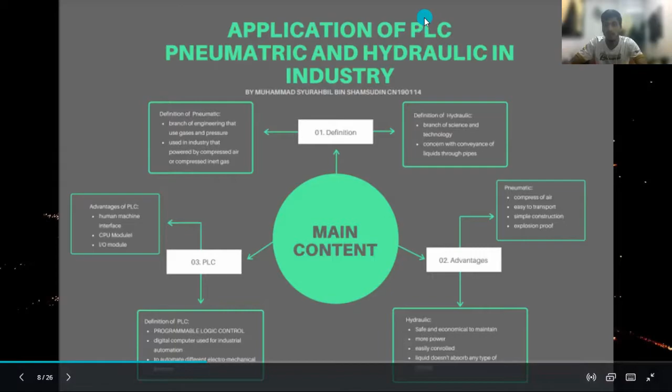Next is week number 2. Week number 2's activity is Miss Maya sharing with us about the PLC course activities from the previous semester. Miss Maya shared it via Author, so I downloaded the slides. I managed to capture some important things from the slides, which is Miss Maya sharing the activities done during physical class, which is PLC application learned during physical class at the lab.

Next is number 5, which is online learning for our current state during this pandemic. So we do online learning. Ms. Maya shared the video presentations and group project presentations from our seniors. Ms. Maya highlighted some groups whose design projects were quite good that we can use as an example.

Another one is about PLC industrial application design. Ms. Maya also shared some projects, such as a fully automated washing machine by our seniors. So that's all for week number 2, which was just some sharing on previous semester PLC class activities.

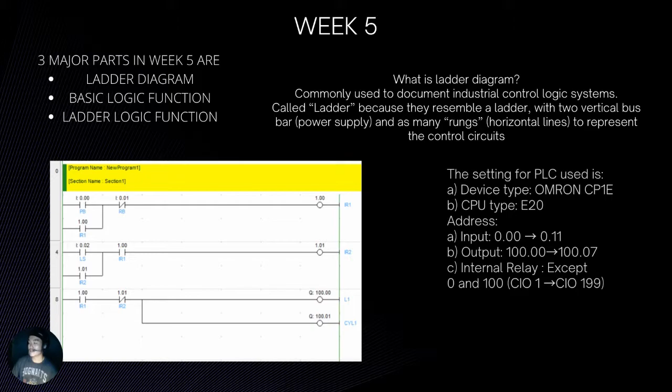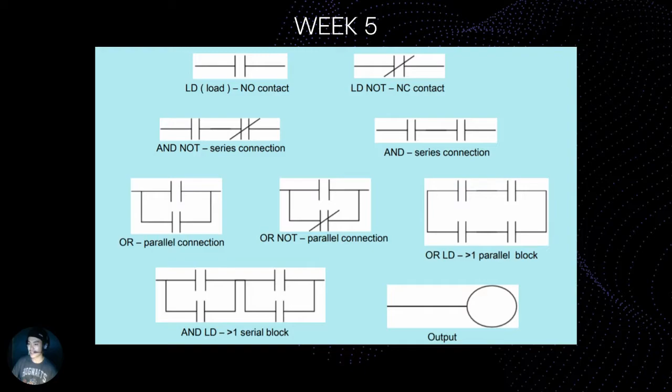In this course, we are using the Omron CP1E E20, and the address for the input output is 20. We also learned about the basics of normally open and normally closed contacts and their connection. Third, we have learned how to convert a ladder diagram to mnemonic code. This is an example of conversion from the ladder diagram to the mnemonic code. And then we have learned about basic logic gate functions, as you guys have learned in physics and digital courses.

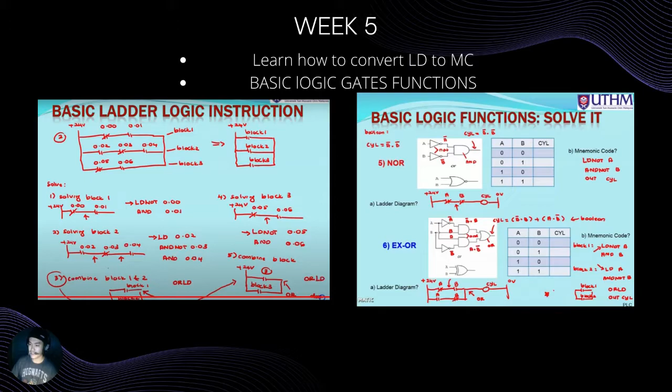And then in week 5, we have also learned about how to write mnemonic codes. We have done a table which consists of rung, step, instruction, operand, and comment. I think that's all what we have learned in week 5. Thank you. In week 6, we have a few case studies.

For example, the first is the float sensor, the second one is latch push button, which applies the normal latching concept, which is the same as set. It's the same as keep instruction. And then the third one is traffic light. This is just a basic traffic light, which consists of 2 green and 2 red lamps. When both of the green lamps are turned on, an alarm will set.

And then there is a car. The car mechanism is basically based on the seatbelt at the passenger and driver, and the pressure sensor, which indicates whether the seat is occupied or not. And then the fifth one is the machine. For a safety reason, 2 of the buttons need to be pushed for the machine to be operated.

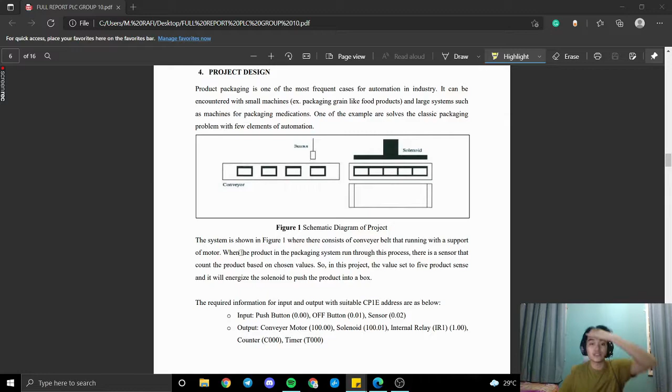So like we all can see right here, this is the program. This program consists of a conveyor belt that is running with the support of a motor. When the product in the packaging system runs through this process, there is a sensor that counts the product. So we need a sensor and then count the product. Thus we need the counter in this program.

So in this project, the value is set to 5 products and it will energize the solenoid. So we need a solenoid, and then the counter will be set as 5. So first of all, we need to clarify the input output address. So for the input, we have push button on with the address of 0.00, and then push button off with the address of 0.01, and a sensor with the address of 0.02.

For the output, we need to have an output for the conveyor motor with the output of 100.00, and then solenoid 100.01, and then we need an internal relay. Internal relay we can pick from the range of 1.00 to 199. So we'll pick 1.00, and then the counter, which will be named with the address C000, and a timer with T000.

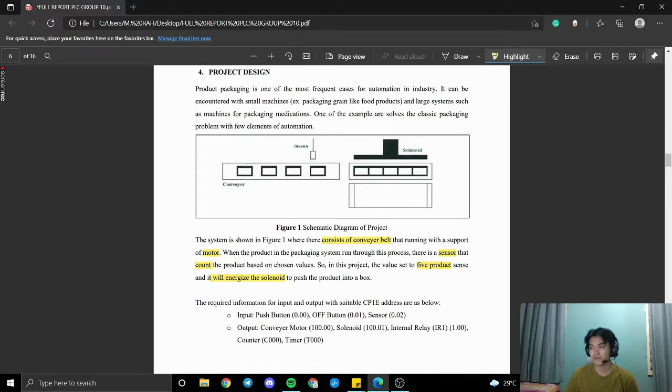Okay, so after we have clarified the address for input output for CP1E E20, we need to do the process sequence description. In this part, it is really up to you. Either you want to use the motion diagram or the GRAFCET method, but in this case study, we'll use simple narrative. This is the column for input, and this is the column for the output.

So number 1, push button PB with the address 0.00 is pressed. The internal relay with the address of 1.00 will have a high value, and the conveyor motor with the address of 100 will energize. And then the sensor with the address 0.02 detects product, and then counter C000 counts down until 5 products.

After the counter finishes the count, the solenoid will extend for 5 seconds, and then after the timer finishes or time's up, the solenoid will retract and reset the counter. And then number 5, when the push button off with the address of 0.01 is pressed, it will stop the conveyor motor 100.00 and all of the operation.

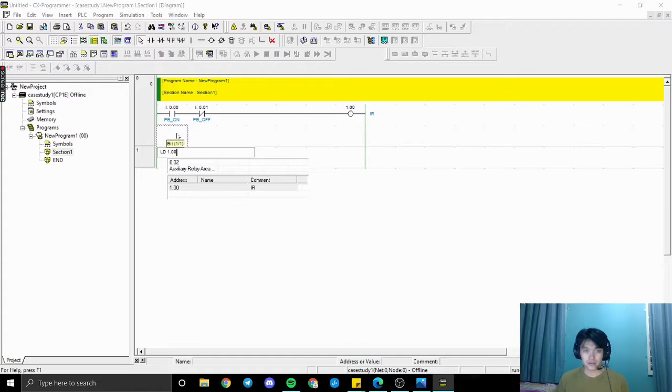Okay, so we will have the internal relay right here. So we click output. So for the internal relay we will use channel 1.00, and we name it as IR, internal relay, since we will use just one internal relay. And then we'll have normal latching right here. So we'll put a normally open contact with the same address as the internal relay, 1.00, and then we'll connect this in parallel with the push button on.

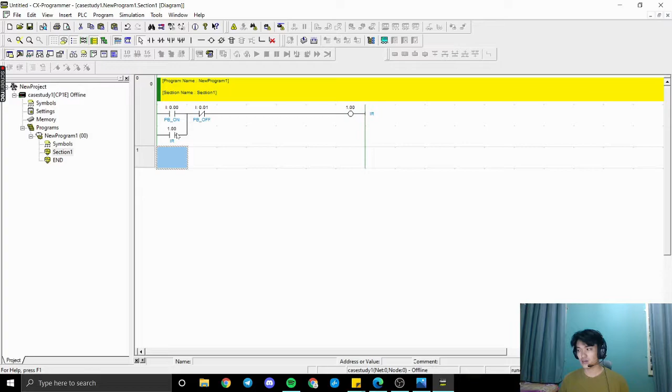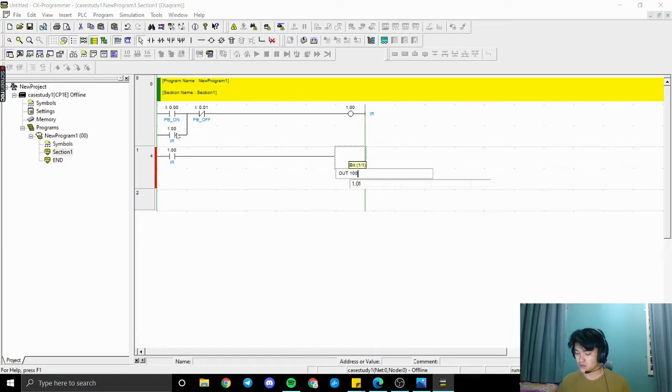So we have finished rung 0, and then the program wants us to move a conveyor belt by using a motor. So we need to power the motor. So we'll put an NO contact right here for the internal relay 1.00, and then we'll have an output right here. Since we have clarified that the address for the motor is 100, we'll put 100.00 right here. So we'll name it as motor. So sorry, motor.

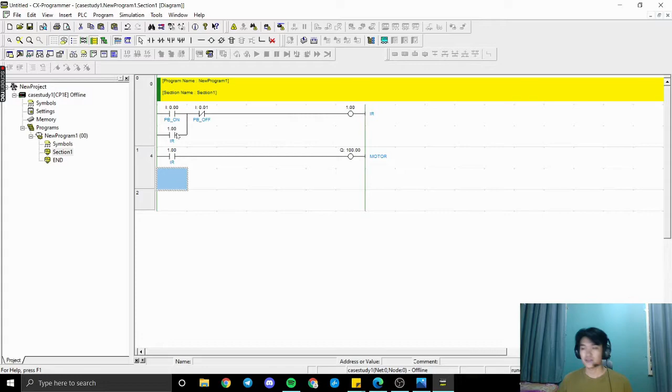Okay, so when we push the button, the normal latching will keep the value always high, and we'll move the conveyor belt. Now the conveyor belt has moved. Now we proceed with rung 2. And then we need a sensor, when it counts to 5, then the solenoid will push the item.

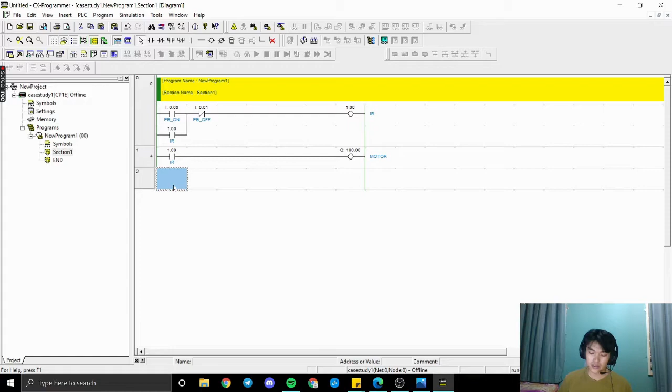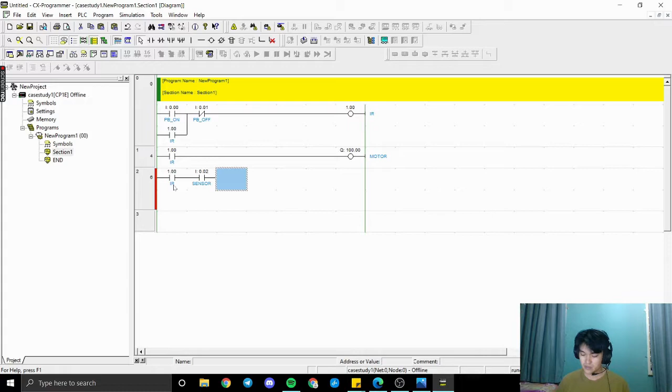Okay, so we need the internal relay right here, and then we need a contact for the sensor. For the sensor, we'll put 0.02. We'll name it sensor, and then we'll put a counter. Wait a minute. And then we'll put a counter, CNT, counter 0, and we'll count it. The value is 5.

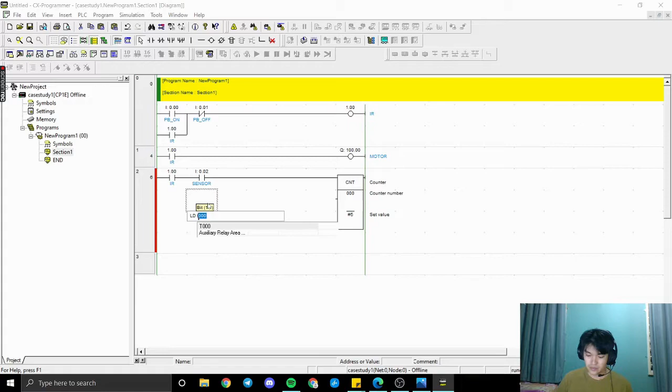Okay. So right here is the reset, and this input is the reset input. So we need a timer. We need to put a timer. I'm so sorry. 0.

Right here, and then this is the timer. I'll connect with this input. Okay, so now we have a counter which is connected with this sensor. The counter will energize when the counter counts 5, 4, 3, 2, 1 in descending order, and then it will energize and push and power the solenoid.

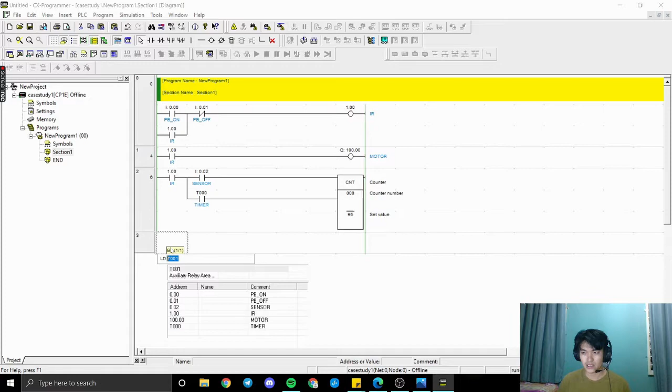So we need a contact for the solenoid. The counter is C000, and then we name it as counter, and then we'll connect it with a solenoid. The solenoid will use channel 100.01. So output 100.01. So this is the solenoid.

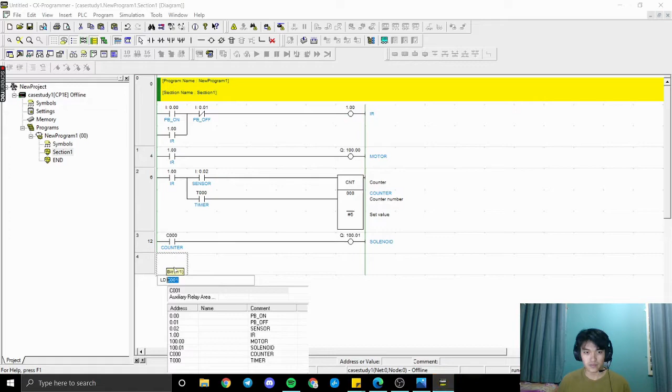So we need to have a timer right here. So when the timer runs out, it will reset the counter, and the system will continue over and over again. So we need a contact for the solenoid. Solenoid is 100.01, and then we'll connect it with a timer. The timer, we'll put it as timer 0, and since we want the timer for 5 seconds, we'll put hashtag 50.

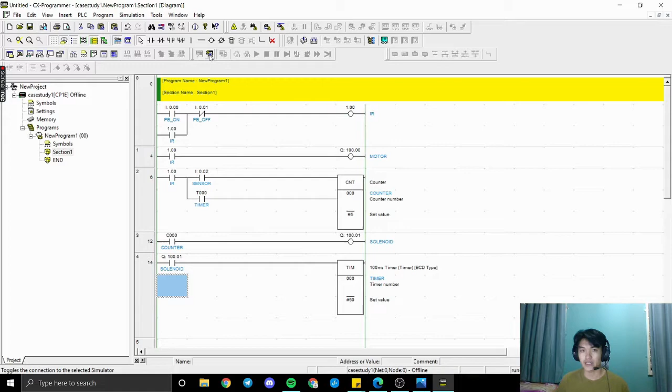Okay, so we have finished this ladder diagram, and then we need to compile it by using the work online simulator. We click right here. Bismillahirrahmanirrahim. So there is no error, and we can use this program. We can test this program after this.

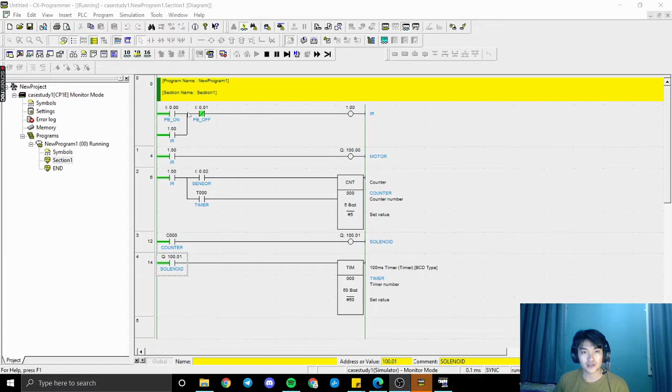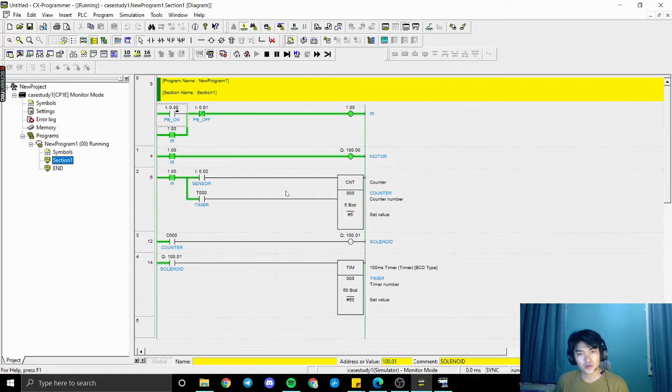Okay, so we have finished writing our ladder diagram, and so we need to test this program by using the work online simulator. When you click here, it shows that there is no error. So when we push the push button, we put a value of 1, and then we put a value of 0, or we release the push button. The program will run, and then the sensor will detect the item moving on the conveyor belt. Right here we can see that the motor is running, and thus the conveyor belt is turned on.

So we can use Control J, Control K: Control J for value 1, Control K for value 0. Okay, we put Control J, Control K. We can see that the counter is decreasing. So if the sensor detects 5 items right here, then we can see that the timer is running and the solenoid is turned on. And then when the timer runs out, the motor will run. So this program will keep repeating itself over and over again.

We'll try it once again. 2, 1, 0. Okay, so the solenoid pushes, and the timer runs out. So the counter will go back to its value.

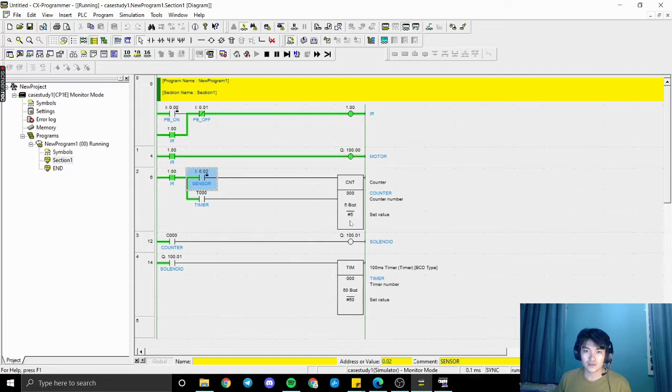Okay, now for the next part, which is troubleshooting errors. So during our learning process, doing the project in the CX programmer, there were times when we encountered some problems with errors. So I separate the errors into 2 parts, which are syntax errors and logical errors. During our learning process for this subject, I managed to learn from some errors, firstly the rung not connected to the output.

So when we draw the ladder diagram with the CX programmer, there was one time when I did the project, and at the end I did not connect the rung to the output. So the output is hanging. So when we compile the project, there will be an error because our rung cannot detect the output. It is not a complete ladder diagram. So that is the first part of the syntax errors.

And the second part is an error when I do the IO memory reference. So when I do the memory reference, such as for the timer, sometimes I'm not able to do the IO memory because I just do the ladder diagram. So when we enter the IO memory reference and compile, it cannot detect it. There will be a red note on our timer saying that it cannot be identified.

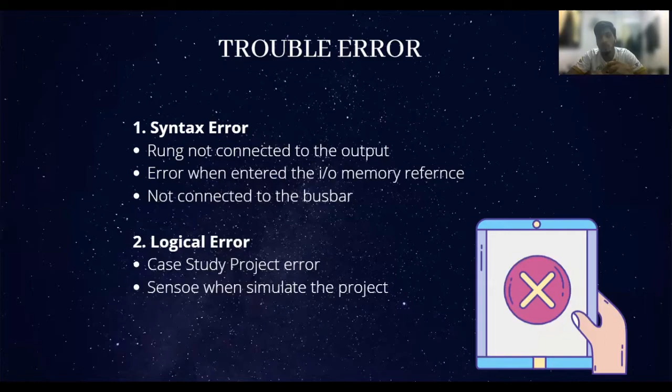So that's all the trouble error. Other than that, it was more the syntax errors when we do the ladder diagram, such as the ladder diagram for the OR node. So from this area, we managed to learn about our PLC and how to use the CX-Programmer.

Okay, in my opinion, for the most difficult topic and my own suggestion to improve the understanding of the topic, I think it is week 7, PLC instruction. During this week, I know Miss Sumaya tried her best to explain to the students how to use the CP1E processor, but since we are under the pandemic and undergoing online learning, I think the best way to demonstrate how to use the CP1E processor is by live stream. So Miss Sumaya maybe can explain how to use the CP1E not in a video but in a live stream, since students can ask questions on the spot.